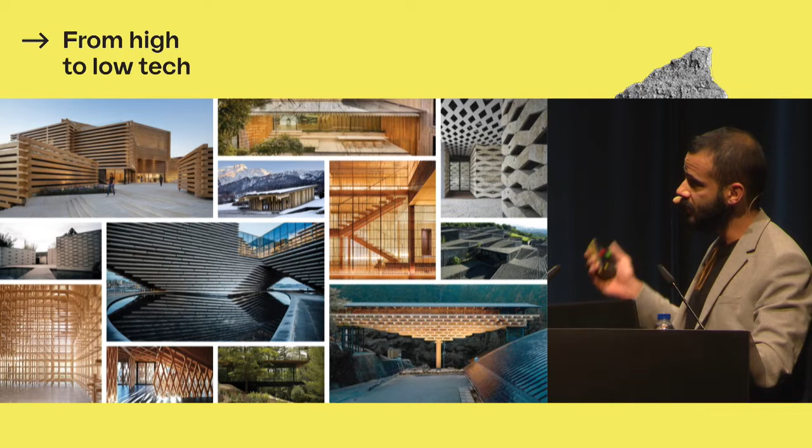So I have to double click. So I'd like to talk about the work that we do, but I will not focus on any specific material or a specific project, even though I'll go through 5, 6 projects. I would more like to share what we call our meta project, which we have been building for the last 5 years maybe, trying to organize and codify the research that happens between the projects themselves, which might look disparate, but there is logic behind the chaos.

For the last 3 decades, Kengo Kuma has been trying to revive the use of natural materials in architecture and to push back against what he calls the homogeneity of industrialized construction. He also half-jokingly often calls this his fight against concrete. And this is a fight that began before concrete had become synonymous with environmentally unsustainable building practices. Because in a way now concrete is the easy punching bag for good reasons.

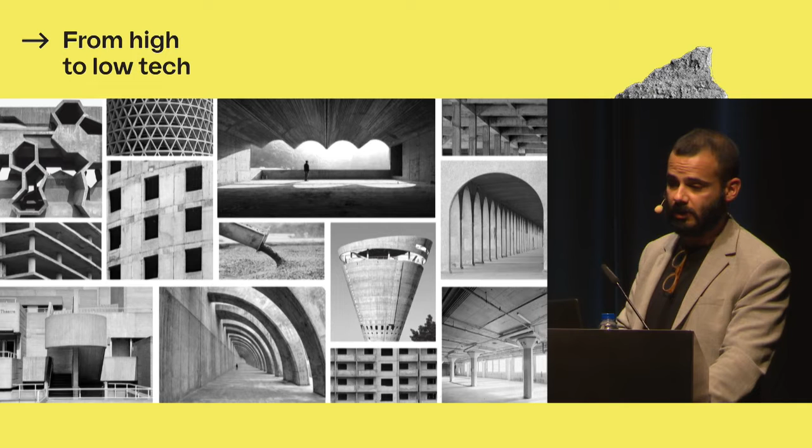Concrete is standardized, it's scalable, it's weather resistant, and it's almost form independent. So it has allowed architects to consider space in abstract terms and to almost disentangle design from material-specific mechanical and functional limitations. So following this separation of space and materiality, local considerations such as weather patterns and norms of habitation and available resources are gradually being displaced. The same material, more or less, works everywhere. In a way, concrete has become a victim of its own success, and we have become its victims in turn.

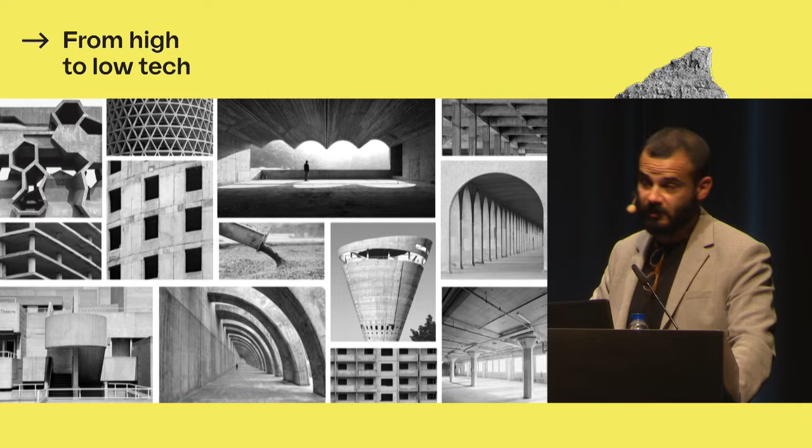So in our office, we have the luxury, perhaps, of having built a narrative that spans 3 decades, where material is the main parameter of design. And I say luxury because this strong narrative often allows us to push our material agenda onto projects. And we often have to be very pushy. And we often fail also to push it. So we want to make a case for material thinking. There are different scales to the story of our material agenda and to how we push it. I would like to start from the small scale and gradually zoom out towards an overview of how we want to rematerialize space.

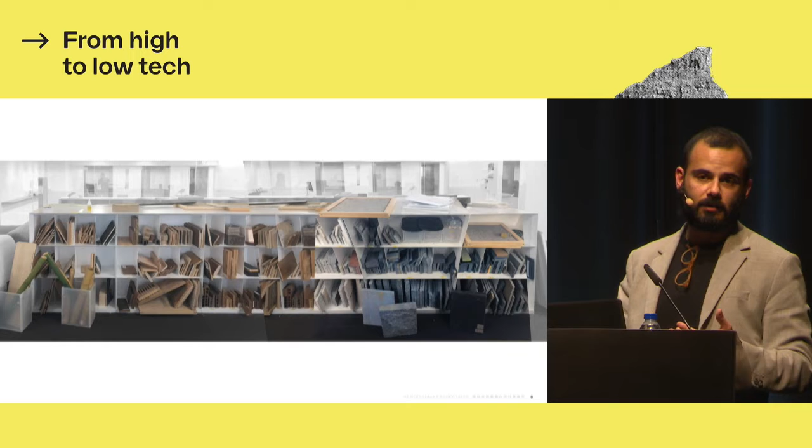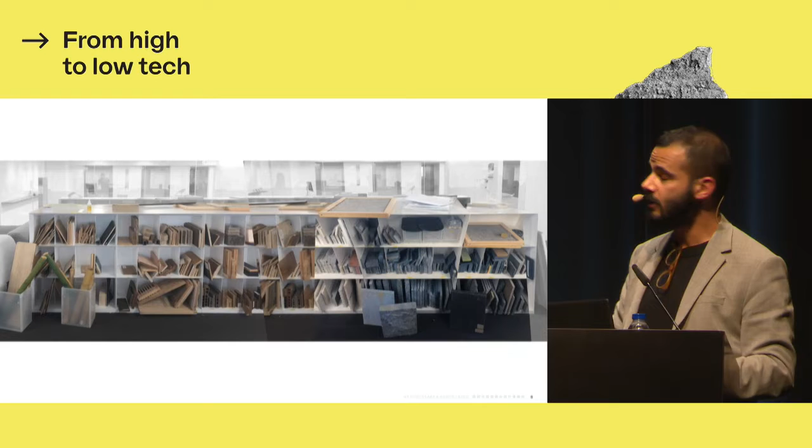In our office in Tokyo, we start concept design with cataloging local materials, vernacular structures, crafts, and techniques. These are then explored, iterated, recombined, either between themselves or with other systems that we have developed in the past and built. And then this library, it's a physical library, it's also a digital library, it's a library of reference, it grows, it keeps evolving, it keeps expanding. We often start by building material vocabularies, meaning modules or elements, and grammars, meaning rules for combining them into bigger assemblies, that often shape the direction of the project until the very end.

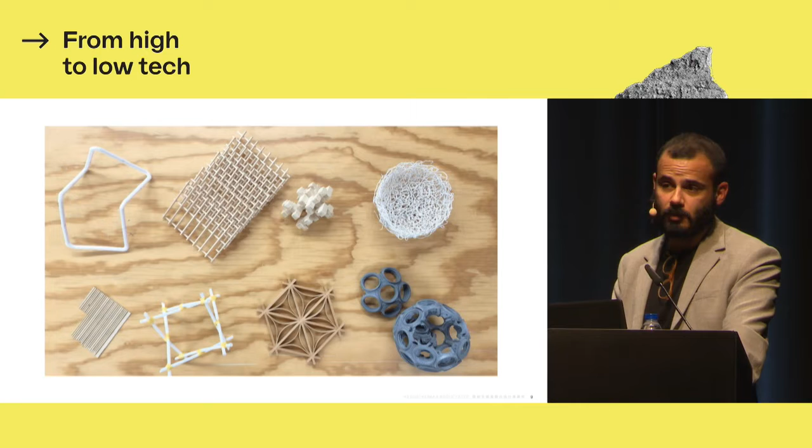This early introduction of the material parameter from concept design has the interesting effect of localizing the design problem before we even start designing. And this is because local materials, as well as their processing and assembly methods, are completely connected to place. In a way, they encode information about available resources, local technologies, weather conditions, and even social habits. And more often than not, natural and composite materials enforce a scale of design and construction that inevitably brings architecture closer to human realities.

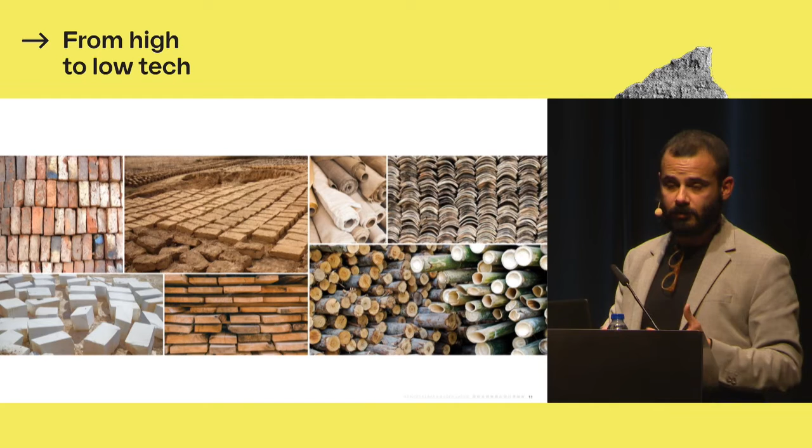Unlike undifferentiated solid megastructures, continuous concrete megastructures, for example, assemblies of smaller elements from discrete materials can reframe for us the narrative of architecture as something that is human-centered and built through a collaborative process of making. We can recapture in our own built environment the scale of things, real things, shaped by human hands. Things like bricks, planks, shingles, or tiles.

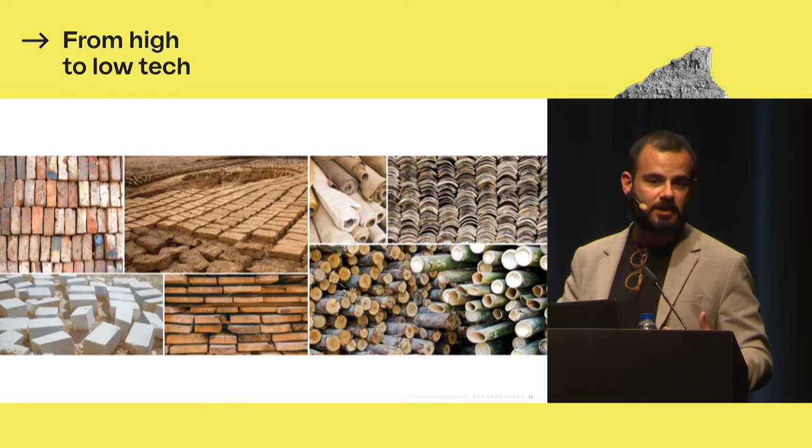They have all been dimensioned by the inherent abilities and limitations of the human physiology, and apparently soon by the interaction of human physiology with machines, but still they refer back to the human body in one way or another. And of course, the affordances of the body of the builders. I am aware that this is a somewhat romantic representation and that what we usually build in cities doesn't look like this, but in a large part of the world, it still looks very similar to this.

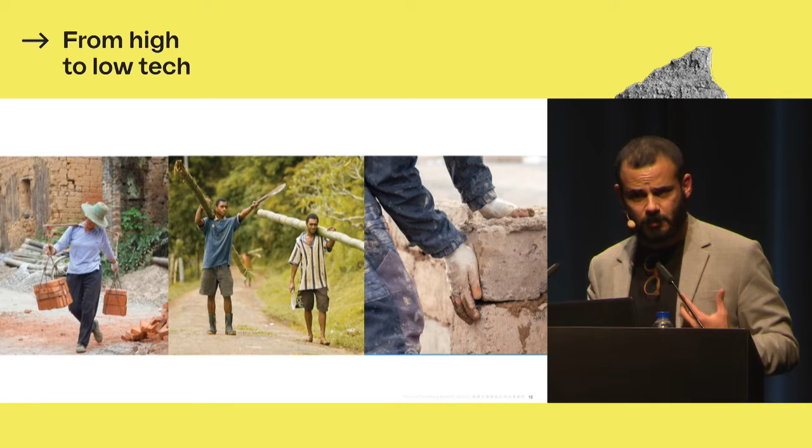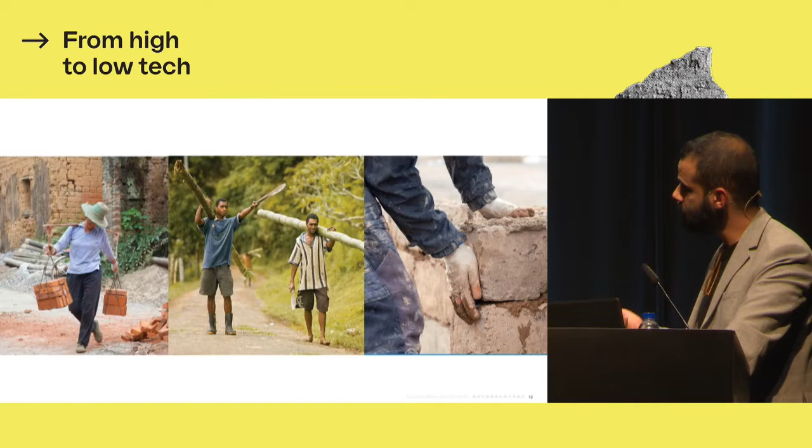And this material-centered thought process actually reflects back on the body of the architects too, who unfortunately often find ourselves locked on a desk, behind a screen, behind software that we hate looking at. Because most of the time, there is no standardization of dimensions or structural modeling of new, natural, or hybrid materials. And this means that design cannot take place on paper. It's just impossible. It has no meaning. But it has to be developed through models, through tests, and through mock-ups. From the beginning, not towards the end of the design process.

So we often find ourselves on the same table with craftspeople, manufacturers, and structural engineers who need to be involved from the very beginning and not just as consultants. So research and design overlap to such a degree that they become entangled, and it is no longer possible to draw a causal arrow from one to the other. So the result is not so much design through research, but rather design as research. And we wanted to show that.

We have been working organically for many years, and we wanted to somehow step back from what we have been doing ourselves and try to contextualize it, try to tame it, and try to see where it could go. So we first tried to show this process of design as research, our meta project, in the 2016 Venice Biennale, Reporting from the Front. The topic of that Biennale kind of put a mirror in front of architects and asked us to face our responsibilities and say, what are we doing to make ourselves relevant? So it was a good excuse for us to start thinking about it.

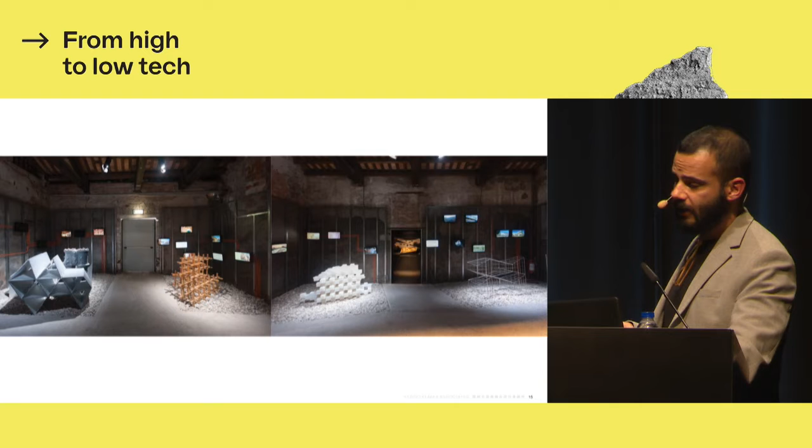We made a selection of about 30 small experimental pavilions in order to show the links between projects. So we showed structural systems that were developed and adapted through trial and error and evolved from one project to the next. We followed these systems as they changed in scale and material incarnations, and we organized them into families. We call them tectonic families. And the way we organized it was in families that were called, for example, here at the top, stacking of planar elements, and at the bottom, weaving of linear elements. So in a way, we thought in terms of geometry and process of combining elements into a larger structure. So this was the first attempt at seeing our projects as embedded in a framework of research.

I need to say, there is also a real evolutionary relationship between many of those projects. It's not that we just put them together, see what looks like what, and then we showed them together. Literally, we would take a mock-up from an unfinished project that was still ongoing, then bring it to another design team, and they need to do something else, but they need to do it in another material. They would try to use it, and it would become something else.

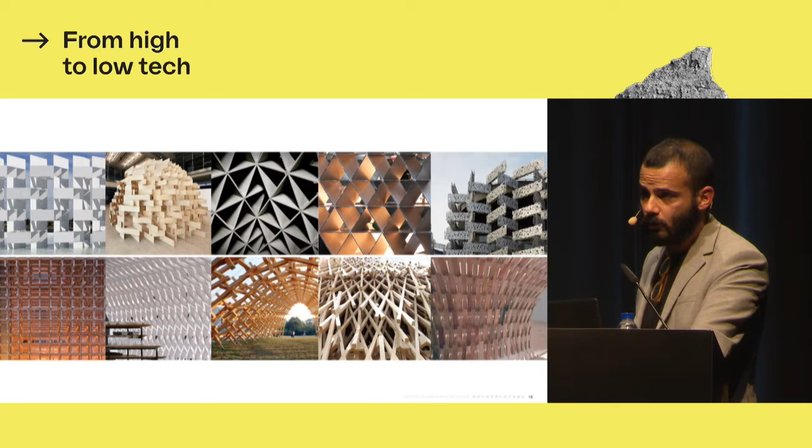So for 2 years following the Biennale exhibit and until 2018, we tried to clarify and expand these genealogies and to document and communicate how the projects were connected between themselves. Some projects were direct evolutions of other ones, while others were born from our attempt to modify a system in terms of scale, material, or structural role.

The result was a large retrospective exhibition in Tokyo Station called A Lab for Materials, where the showpieces were not buildings. We were not showing buildings at all, but families of materials, assembly patterns, and construction techniques illustrated through large life-size mock-ups. Often the same mock-ups that we had used in construction sites. If they were still in Tokyo, we used them in this exhibition. Unlike the more limited Biennale exhibit, this research tried to cover almost all of Kengo Kuma & Associates' built work.

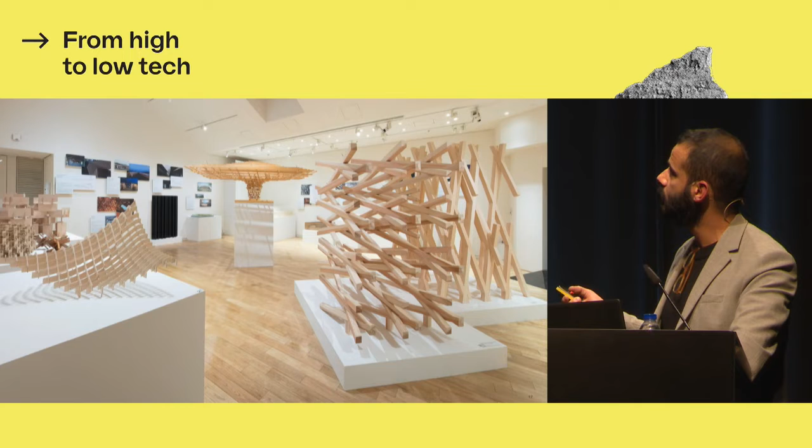To place it in one overarching diagram, a taxonomic tree, we could call them genetic relationships in a very broad way. They do not exist among different versions of the same system family only, but also laterally across systems. What we wanted to show with this exhibition and tree diagram is that the implementation of new material methods does not happen individually within the confines of each project, but there is an underlying network of previously tried ideas. And there is an iteration on this network that produces new nodes and experiments that can grow this tree.

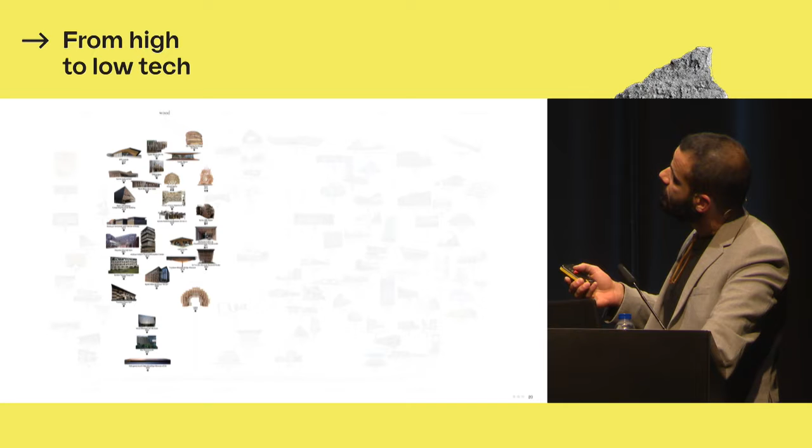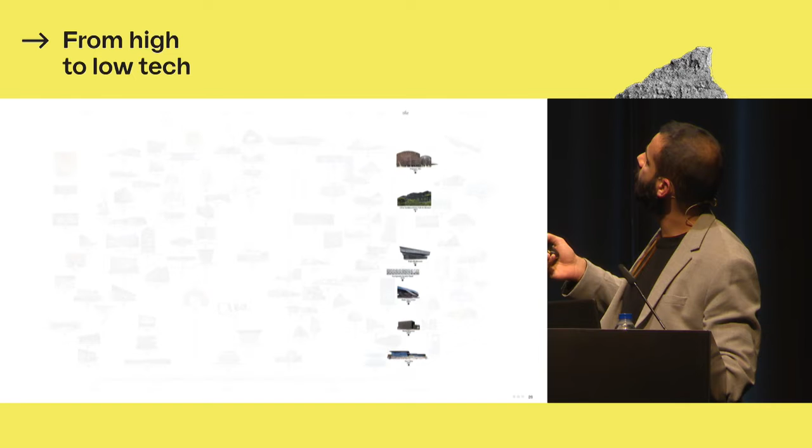In this tree, we included as much of our built work as possible, about 107 projects. We organized them by material and operation, and tried to highlight internal narratives of evolution, both vertically and horizontally. So you can see it iterates through materials: bamboo, wood, paper, earth, stone, metal, glass, tile, resin, and membrane or fiber.

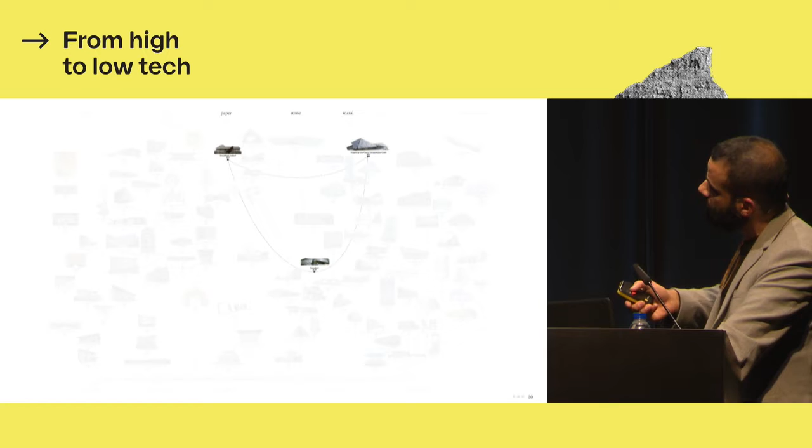But also across the different vertical families or tree branches, lateral lines connect projects that represent jumps, meaning a change of material under the same module or assembly logic. For example, the thin panel triangular lattice systems, which we developed about 2 years apart. One is called Polygonium, in extruded aluminum with aluminum sliding joints. And the Stone Card Castle that came a bit later was done in Pietra Serena with local craftsmen from central Italy, in a completely different context, with different joints and implications.

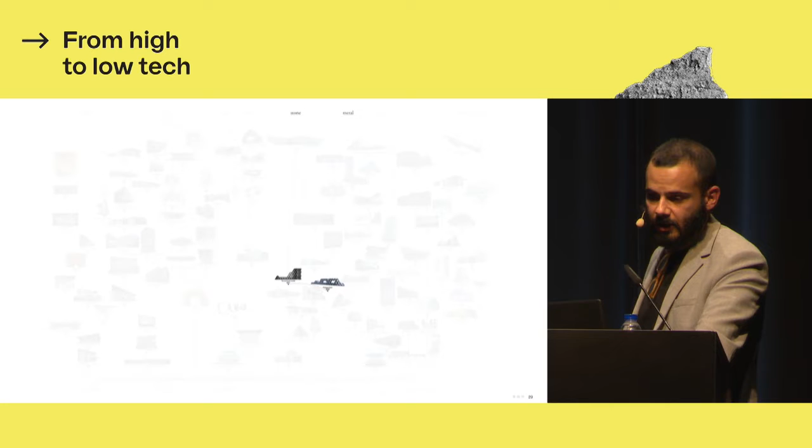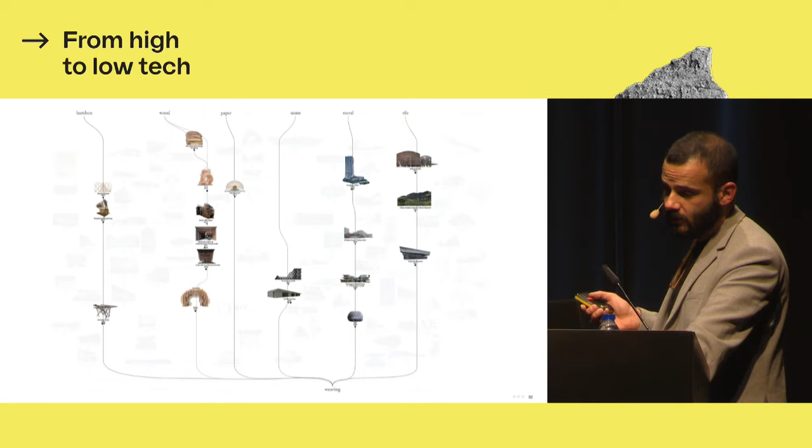And then, running across the different material families and linking them are the methods for combining elements. We call them particlizing, weaving, reciprocating, wrapping, and stacking.

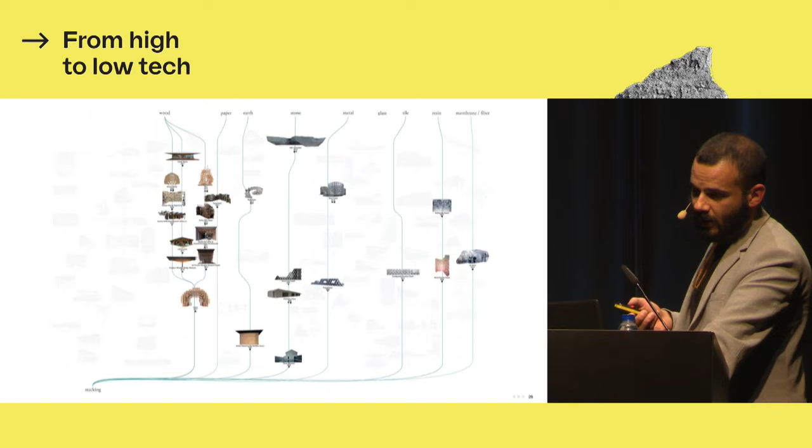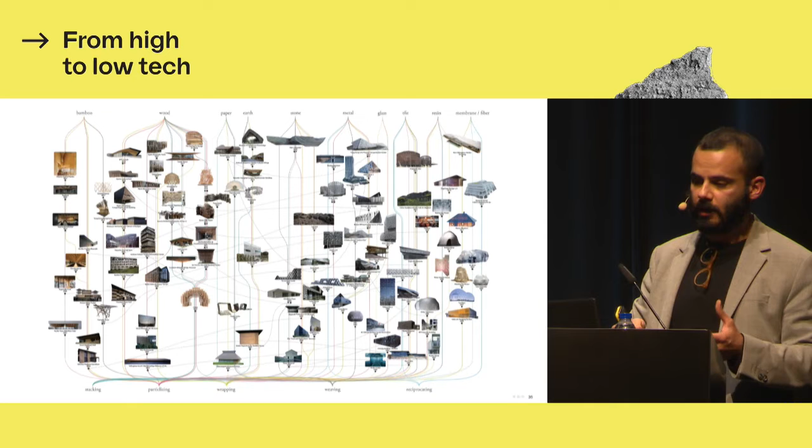I have to emphasize that the categorization into these taxonomies is not strict. This is not a scientific classification. It emerged intuitively as we talked about our own projects, out of a process of employing materials in human-sized units, like sticks, panels, tiles, loops, which are then combined through assembly operations into larger aggregations. And then they work as furniture, partitions, facade envelopes, or building structures. So we prefer to use this diagram as a map that traces the lineages of material research and the affinities between the projects, both past and future.

But most importantly, we use it to make the point that design, especially a material-centered, non-standardized design process, is inconclusive and continuous. Every new node in the tree diagram just poses new questions. None of these is finished, and none of these is perfected or finalized.

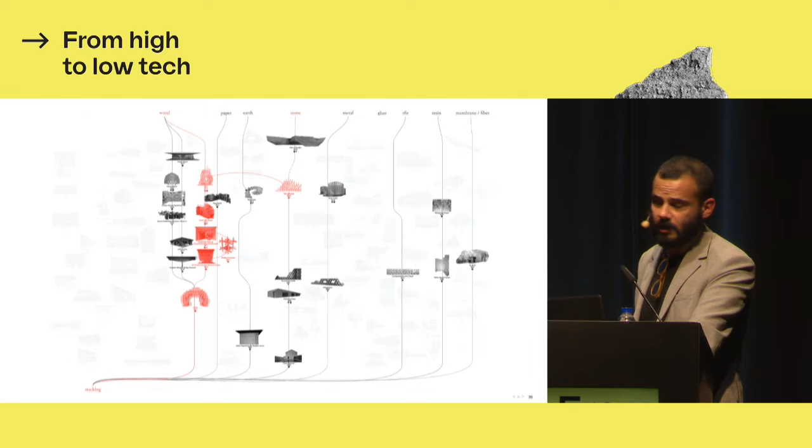So the entire tree goes through 107 projects. And I would like to take you through one of the sub-families, which is perhaps one of the most recognizable ones, the one we call wood stacking. It could also be called wood weaving because it combines the stacking and weaving processes, mostly.

We can follow the wood stacking lineage and observe, sequentially, how a construction system inspired by a traditional toy develops. It scales up, it warps, it becomes a screen, a structure, a framework, and finally switches material to become something completely different, in the span of 8 years and 7 projects.

The wood stacking family started with a fascination about a traditional joinery system. The system is called chidori, and it was originally used as a novelty. It wasn't a structural system, it was used for screens, and nowadays for the creation of a wooden puzzle toy, in Hida Takayama, an area in central Japan famous for very sophisticated carpentry.

In Mumaya Valley, in Hida Takayama, one of the earliest examples of this joinery system is still preserved in a small repository. The story goes that in the early 1600s, a master craftsman created a screen door that no one could understand how it was put together, until a rival carpenter who couldn't stand this anymore snuck behind the screen and cut it open. And he understood the joinery. We know the name of that carpenter, Jinbei Okada, because he popularized the system and started building it everywhere, mimicking the original method and making it very popular in Takayama.

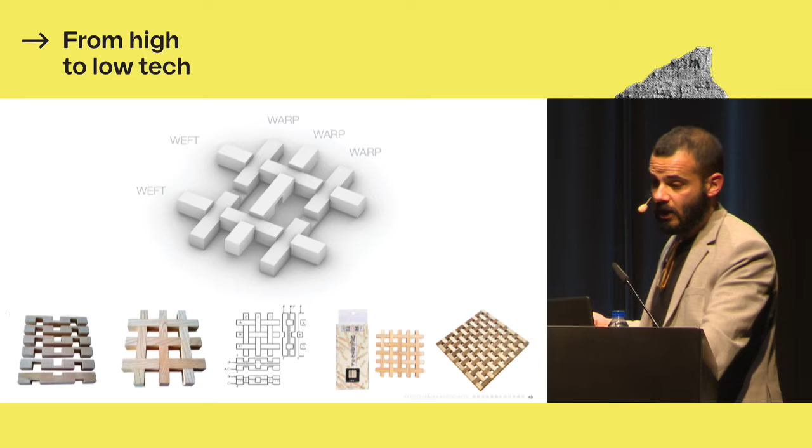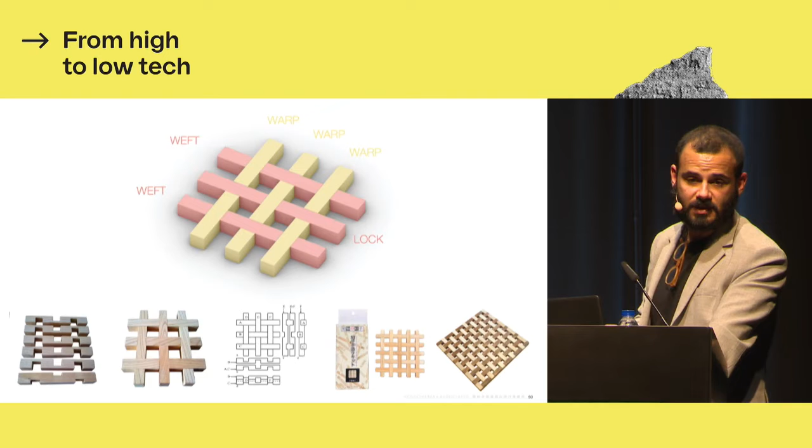Then we have exactly enough space in the center for one last stick called the lock. In the toy pieces picture, the last piece is slightly different - the notches are 1/3 through the stick, not 2/3. This means once we slide it in and push the whole assembly down, it locks, and it interlaces into the Chidori weave. Of course, the opposite process is needed to disentangle it, but if you don't know exactly what stick is what, you can spend a lot of time pushing them around until something moves.

This system was used for 2-dimensional screens originally, but variations exist in Takayama where a similar 3-dimensional joint is created. It's the one that looks like a 3D cross. There are many different flavors of this.

This XYZ joint intrigued us more than the screen, because it showed us the possibility of creating a wooden structure that can be locked and unlocked into place without any tools, without any nails, without any additional components.

There is this common narrative of Japanese joinery - structural joinery assembled without nails, but structural joinery locks in place and cannot be disassembled. But these joints were different - they were intended to be disassembled by a single person, like a toy.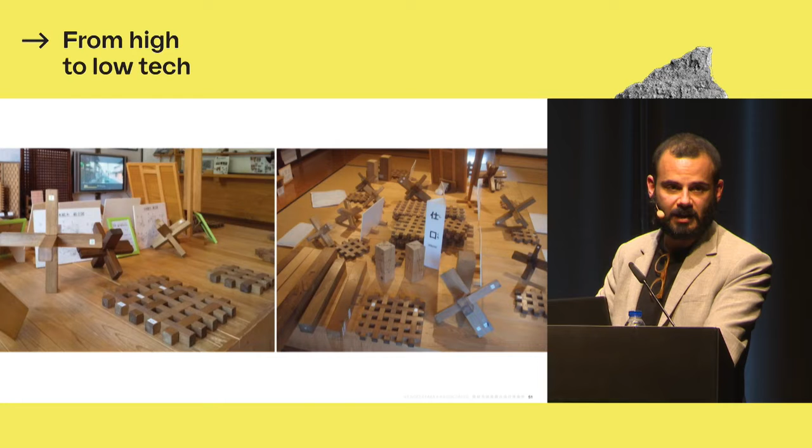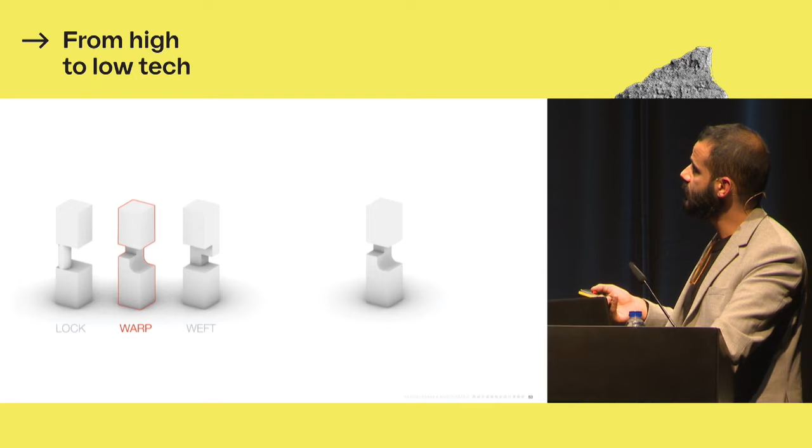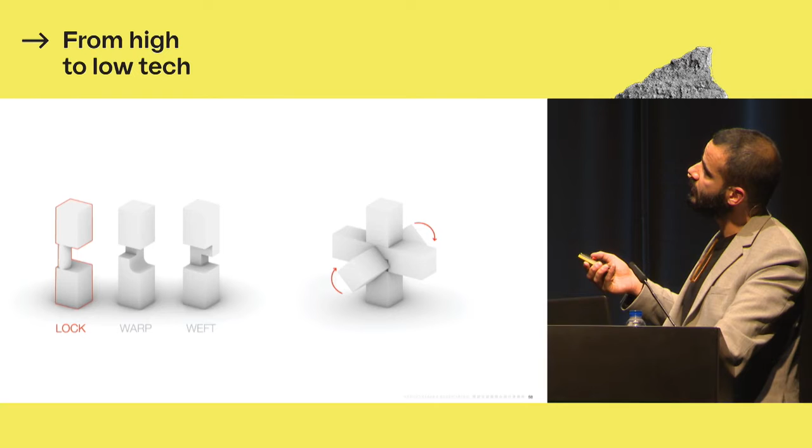The logic of the 3-dimensional joints is similar to that of the 2-dimensional screen. We have 2 directions that weave through each other, and the 3rd direction acts as the lock. So the assembly starts with the warp. Then we put the lock element and rotate it into place just enough so that we can slide the weft all the way in. Then the pivoting lock part can rotate again, and we end up with an XYZ cross joint.

The joint is invisible. It's less stable than the 2-dimensional joint, and this is something we had to deal with eventually. But as architects, we were deeply intrigued by this idea of an invisible joint that locks into place just through some 3-dimensional manipulations. So we really wanted to make something with it.

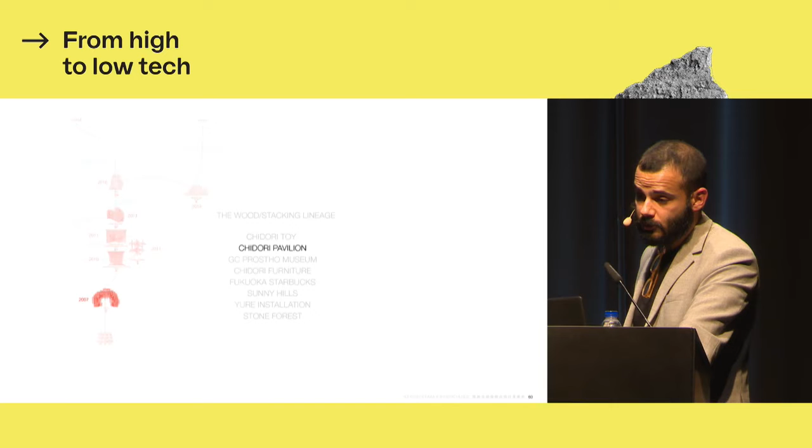We wanted to make a pavilion, and we got our opportunity in 2007 with an invitation to build a pavilion for the Milano Salone. The pavilion was made of continuous sticks with several notches for the intersecting nodes, but it was very challenging to put together.

Unlike the traditional Chidori screens or cross joints, here we have many different sticks, many different lengths that correspond to this organic outline that we wanted to make, both the exterior envelope and the hole inside this wooden cave.

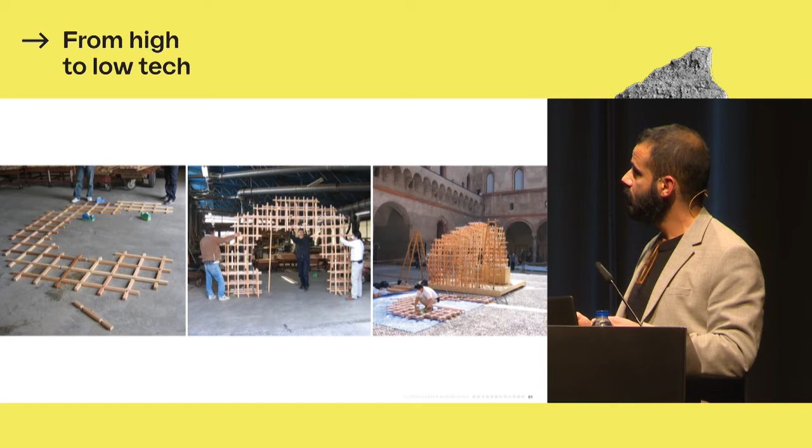So in order to manage the complexity of this assembly, we had to create two-dimensional sections with their respective instructions, slices of the pavilion if you want, and then we had to lift them vertically, support them temporarily, and then bring the third direction and rotate them into place. It was acrobatics with many workers.

It worked, and the final pavilion was very lightweight and transparent, but also very pliable and fragile, due to our decision mostly to maintain fully operational joints without permanent fixations. So after the exhibition, with only a few strategic twists of the members, the pavilion joints unlock and it just breaks apart into the component sticks.

So the Chidori system was clearly applicable on an architectural scale, even if it's a small architectural scale, but it left many open questions as to its structural capacity. Bonus points if you can see the extra support stick because the pavilion was bending - it's a bit hidden in this photo.

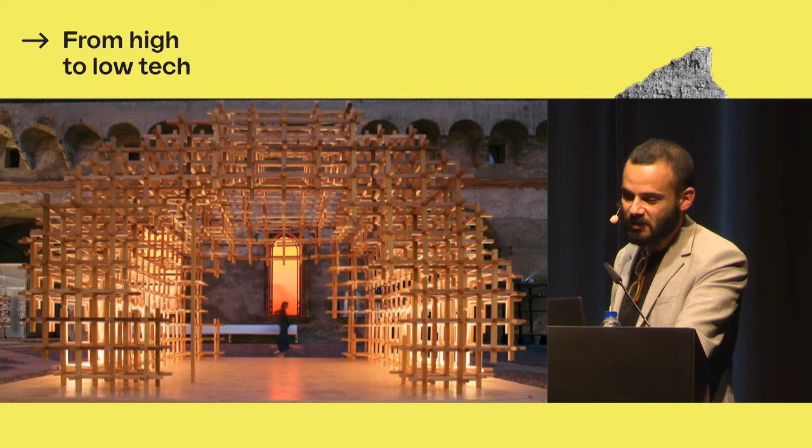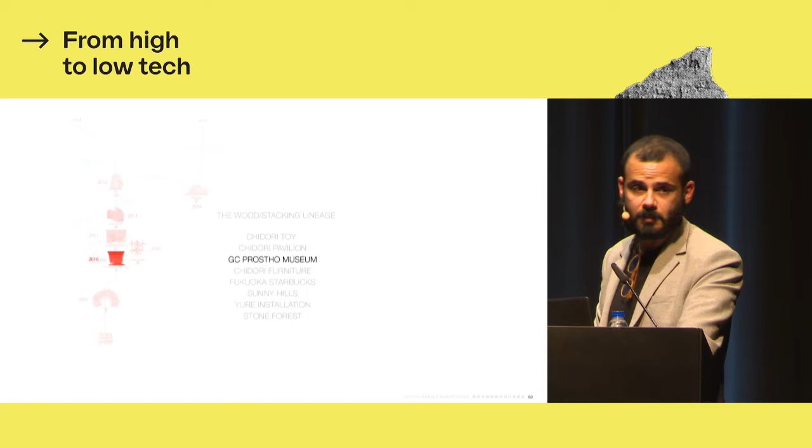For this reason, we wanted to try and apply it to a full-size building and push this joint system to structural sufficiency. This happened in 2008, a bit more than a year after Milano Salone, when we got the opportunity to design a museum and exhibition space for a dental clinic in Western Japan called GC Prostho Museum.

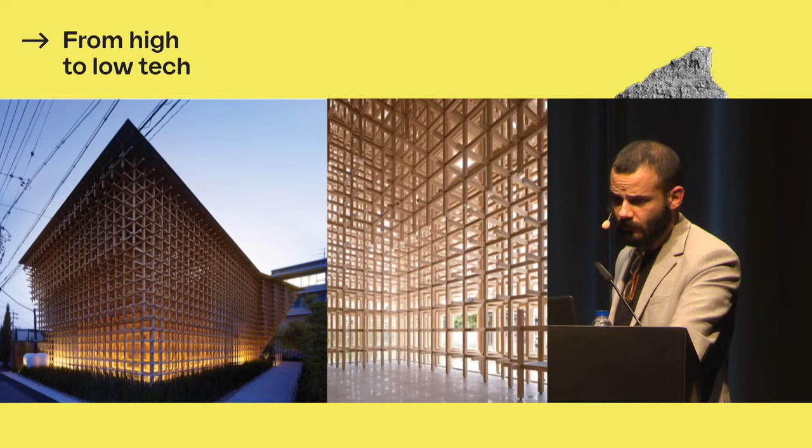We ended up building almost the entirety of the museum using 60 by 60 millimeter sections of wood with a small core buried inside, done in conventional construction. One of the main lessons of the Chidori Pavilion was that there is a price to be paid for the mobility of the joint. The entirety of the section of the wood member, as you remember the joint, is not used structurally because we have removed most of it.

Only a quarter actually transfers loads across the joint. So because of this reduced structural section, we increased the size to 60 by 60 millimeters, while in Milano it was half the size. And we decided to immobilize the joints after assembly, permanently locking them into place. So the entire structure was organized in sub-blocks that were sufficiently rigid, and they were connected to each other through a slotted joint system that is slightly visible at the ends, at the fringes of the block.

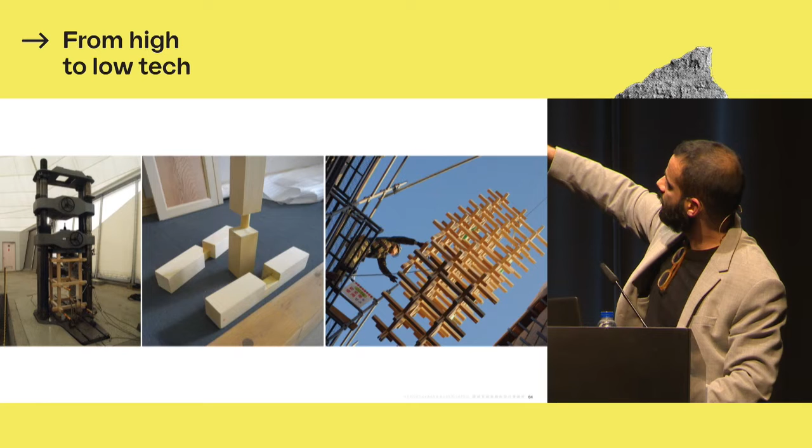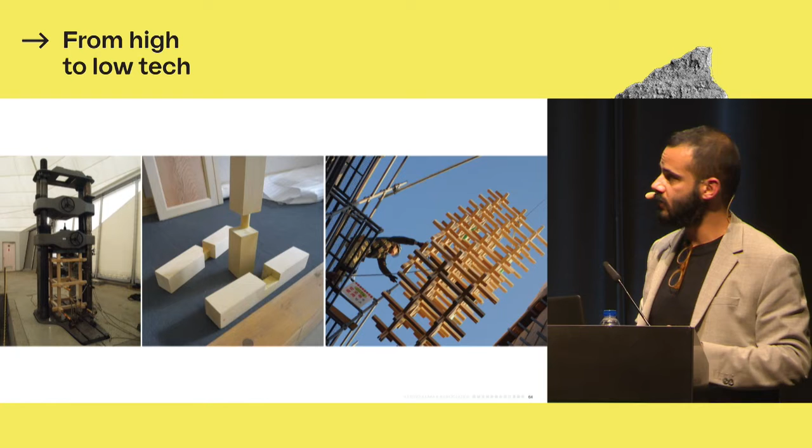So we did use the modularity and the mobility of the joint to make the bigger modules, but then we locked them into place. Of course, extensive structural testing had to be done since the loads, this was a real building, and the loads would be distributed to hundreds of individual small members, which is very different to the standard strategy of having a few concentrated columns, and it's rather atypical. So we had to research this almost from zero.

GC Prostho was one of the first projects where we started realizing the synergies that can be gained from this kind of porous material envelopes, where architectural elements no longer perform single roles. And the sticks are not only supporting the building, but they also function as window frames, furniture, and display cases. And almost everything is expressed through a single continuous system.

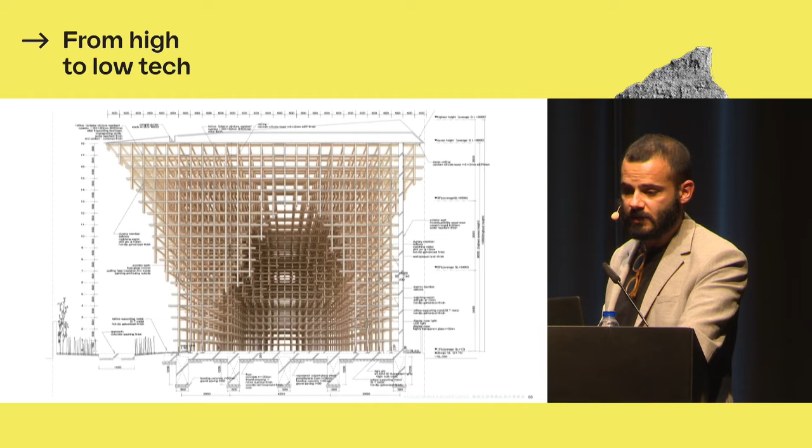So in the end, we had to give up joint mobility for structural integrity. But three years later, in 2011, circumstances allowed us to use Chidori in its original form as a deployable system that can be disassembled.

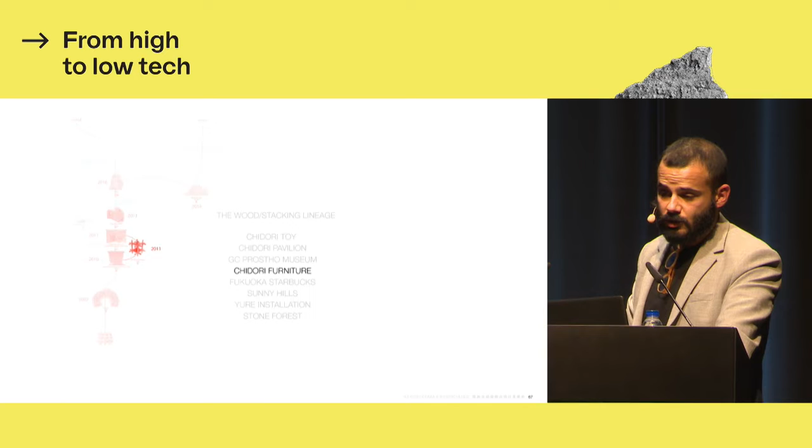In 2011, a devastating earthquake and tsunami hit the coasts of Tohoku, causing large-scale destruction in urban and rural areas alike. And as a bonus, it exploded a nuclear power plant too. A few months after the disaster, Japan was still trying to cope with everything. The East Japan Project was formed.

East Japan Project brought together designers and architects from all over Japan and paired them up with craftspeople from the region of Tohoku. We collaborated with the artisans to develop novel items that made use of local materials and human expertise, offering support and increasing the visibility of the recovering communities as these items were then sold into museums, galleries, and boutiques. The Tohoku region is famous and it has been traditionally associated with small-scale craft manufacturing.

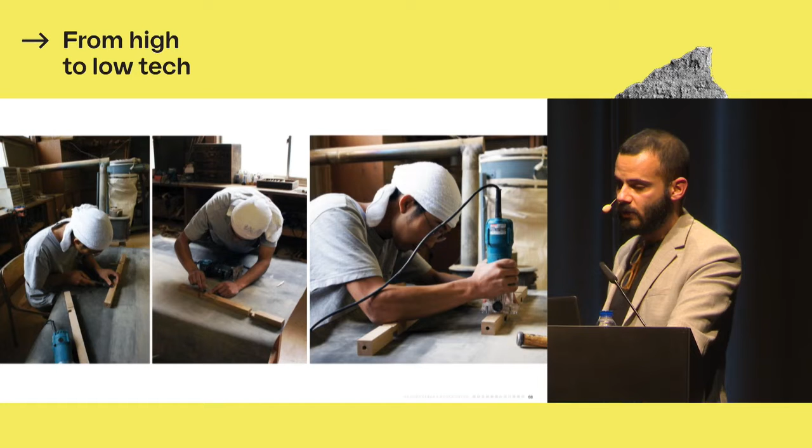So we decided to work with the local carpenters and make a furniture system based on the Chidori joint. So we reintroduced the rotating joint function that allows quick disassembly. But unlike the Milano pavilion, we standardized the stick elements and brought modularity into the system.

So we now had a set of 12 equal length sticks, if not identical, because we had 3 different kinds of stick role - the warp, the weft, and the lock - plus flat wood surfaces. And this would be enough to assemble a self-sufficient Chidori furniture module.

The module is cubical, and its edges extend by half the size of the cube. So we then connect these spiky cubes with simple wooden plugs into larger assemblies and different combinations. It was really a simple cubical grid, but the flat panels that worked as shelving also helped us create rigid planes and help the whole thing stand much better than the original Milano Salone pavilion, which was quite shaky.

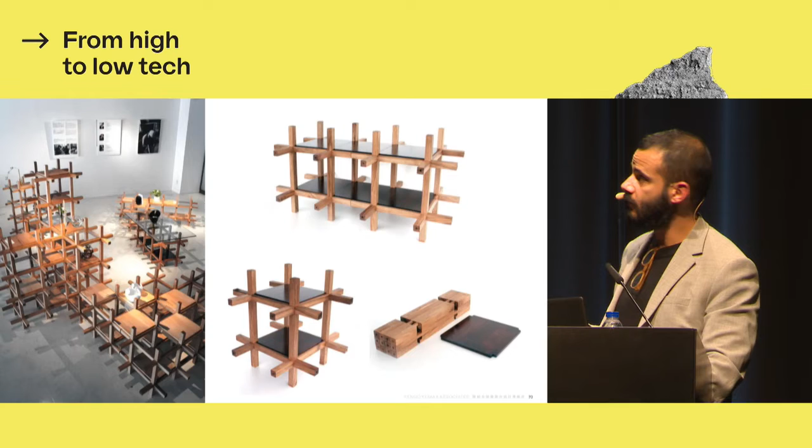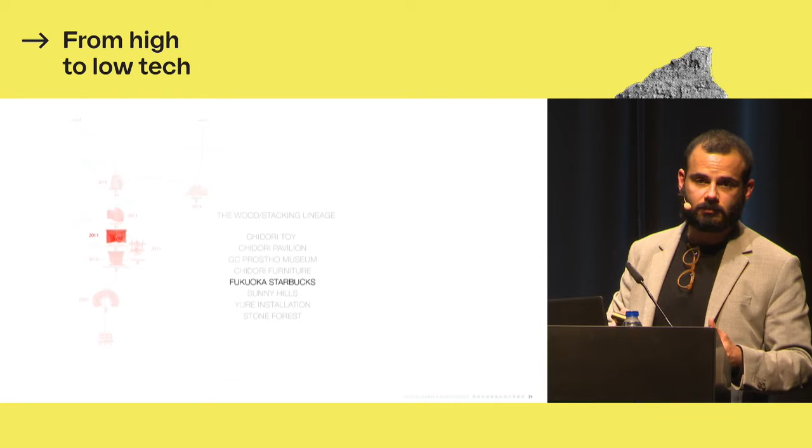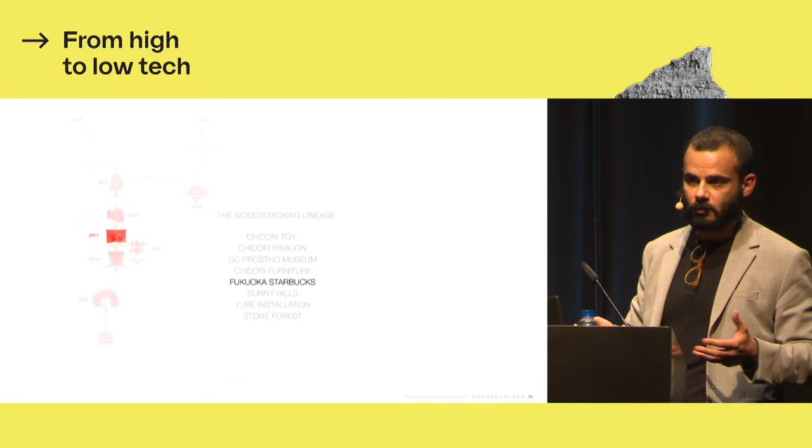In parallel with the development of this furniture system, we started exploring more radical variations. The space that we had created in GC Prostho Museum, this wooden lattice spreading like a transparent cloud of solid elements, was something that showed us a lot of possibility for future design iterations. So we wanted to explore that more and to investigate the idea of a dispersed, particleized - this is an invented word, but we use it - particleized structure, or a particleization of architecture.

And we got the opportunity to do this in 2011 when we were asked to design the interior of a Starbucks cafe in the historical area of Dazaifu in Fukuoka, in the south of Japan. The main challenge was how to draw people inside a deep and narrow space with a very small face to the street. So we wanted to use a grid cloud, like the GC Prostho Chidori system, in order to create an environment, a ceiling, and the shelving elements.

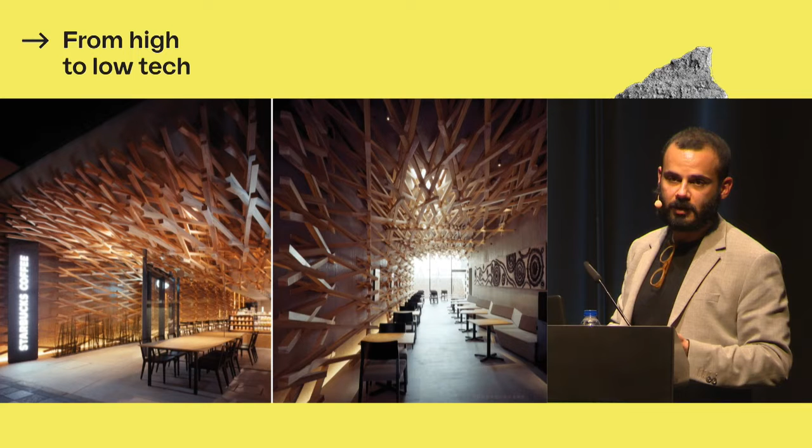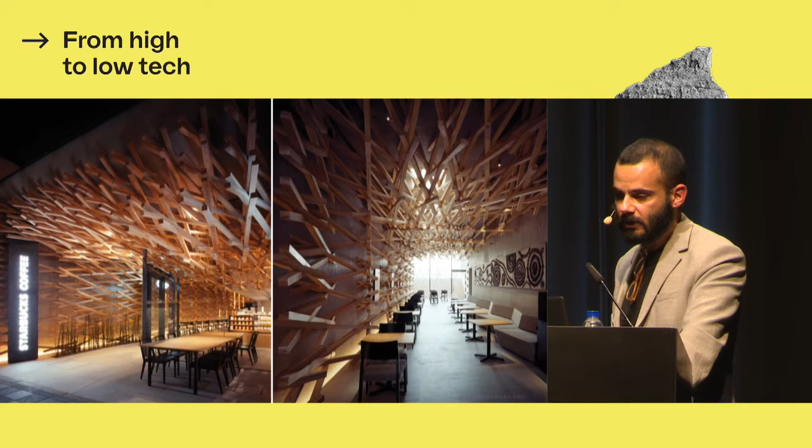But there is, of course, a problem with cubic grids. They are not directional, they are static. So we tried to deform the cubic Chidori into an oblique three-dimensional lattice, diamond-shaped, and to give it a sense of fluidity, but also to give a very different perception of its density and shape according to how it was approached by the people.

It wasn't as simple as just deforming a cubic lattice, we soon discovered. So we had to start rethinking it. Orthogonal grids have the wooden members crossing at every intersection, like 3 wooden members. But this oblique grid ended up having 4, which necessitated wood joinery of greater complexity. And actually, we ended up using steel dowels, sandwiching the 4 members together.

We had to simplify a bit. So we broke the grid apart into smaller elements, maybe closer to what we did with the Chidori furniture system. And these elements look like X-shaped butterflies. You can actually see them. These butterflies are joined to each other, and each of them is joined to 4 other butterflies with these steel joints. The sticks are 60 millimeter square in section, exactly the same as the GC Prostho Museum.

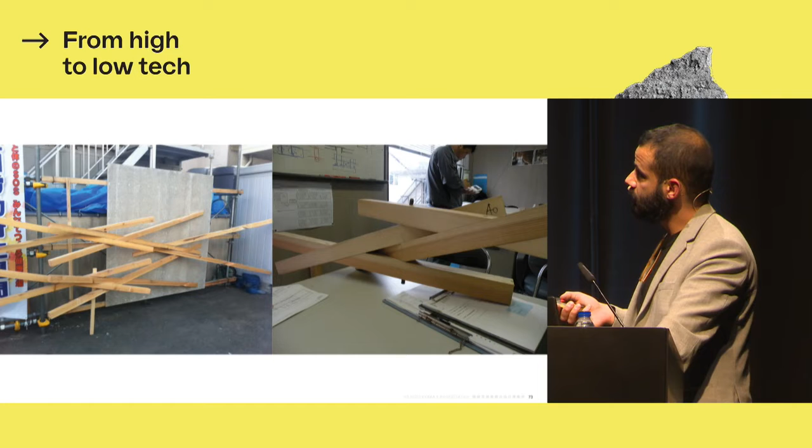But the joints are fixed from the beginning. There was never any mobility there. They cannot be disassembled by hand. This oblique grid had a very beautiful lightweight appearance, but it also had a very obvious drawback that we wanted to deal with in another iteration of the system.

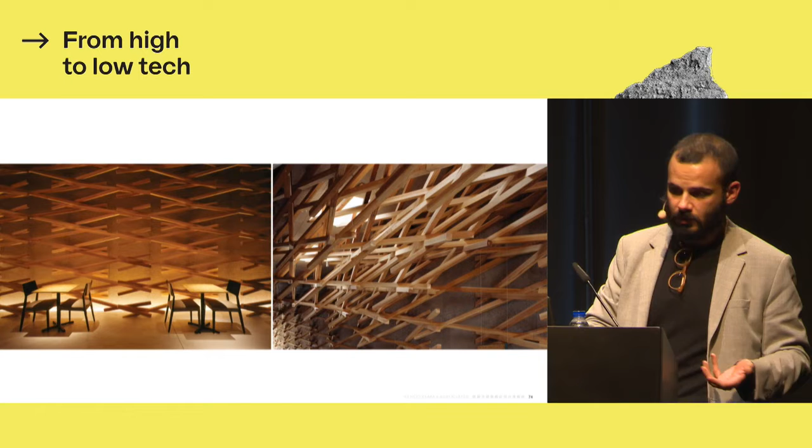Because of the way the modules are joined together, and this is something you can see more in the left picture in elevation, there are no continuous linear elements throughout the whole structure. The elements are interrupted. This means that if you want to load this structure, you cannot effectively transfer loads. It will collapse. The joints will break. And we wanted to use it as structure, and we wanted to use this directionality that it has in order to create a structural direction to the system.

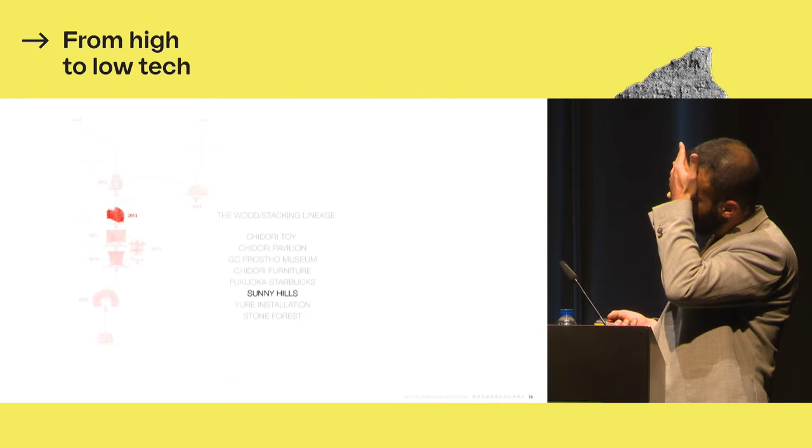So we rotated it 90 degrees. And then, of course, we had to redesign it. In 2013, we were invited to do a pineapple cake shop in Tokyo. And it was one of those dream clients that lets you do anything you like. By rotating the oblique lattice of Starbucks Coffee by 90 degrees and creating a vertical framework, we transformed this lattice into a structural system to take loads for a small 3-story building.

But of course, rotating was not enough, because as you saw, there was no continuity, and we had to redesign it. In order to redesign it, we went back to the source, the original 2-dimensional Chidori frame. We created these lattice surfaces that lock into place exactly like the original screen system, with weft, warp, and lock members. But unlike the original, these are deformed into a diamond lattice, which comes into play later.

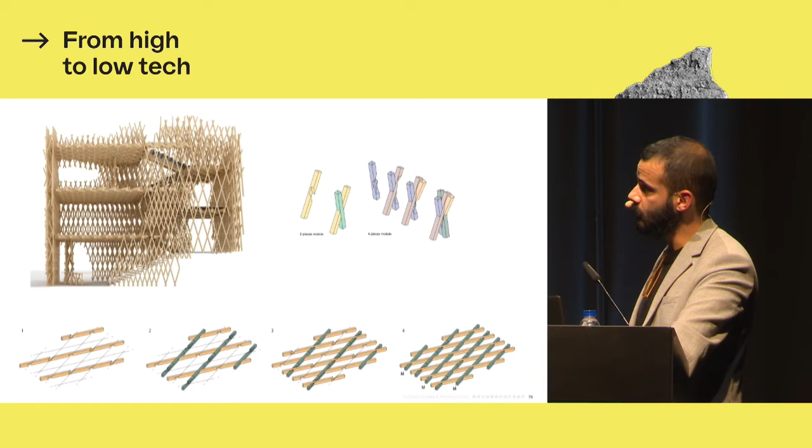Also, as opposed to the previous iterations, if you see the diagram of the building, we also tried to vary the scale of the lattices using a variety of densities throughout the building, depending on the architectural role that they would play as dividers, facade elements, or even interior furniture. It was a continuous system, but with variations. And like in the Starbucks cafe in Fukuoka, this wood joint system would have 4 sticks coming together at each joint, but with a slightly different arrangement.

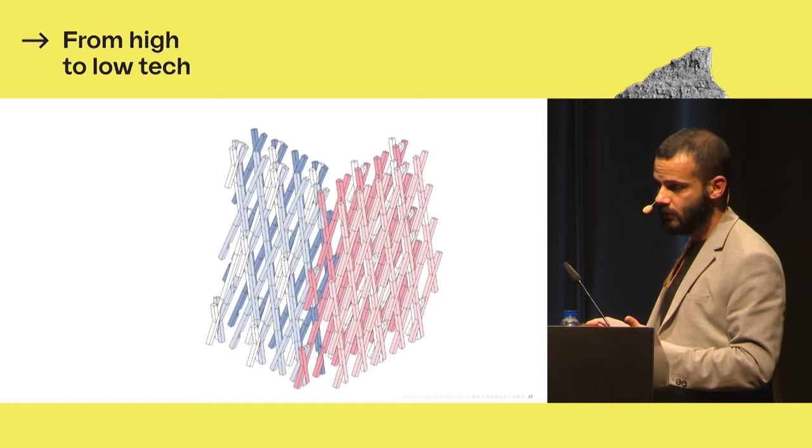So the structural walls are comprised effectively of 2 of the screens that you saw, the diamond-shaped screens, in parallel, sometimes even 3. And then we introduce 2 more directions that are interlaced and lock the whole thing and make it possible to transfer lateral forces as well. So it works as one body.

And we started calling it an exoskeleton, actually, because for us, it stood in opposition to the more usual way of supporting buildings with a vertebrate skeleton with internal, rigid, concentrated bones. Instead of that, we have a dispersed structure that works around the building, that is not separate from the facade, dividers, or furniture.

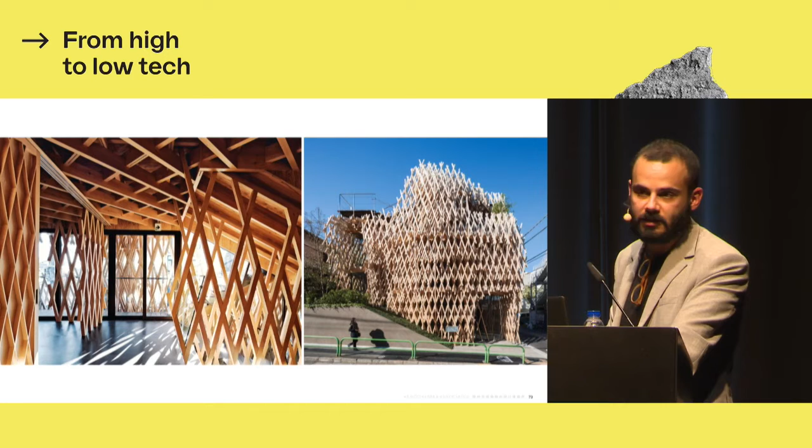But supporting a 3-story building, of course, required stronger joints than the one we used in Starbucks. Just piercing everything with a steel dowel would not do it. So we had to go back into Japanese joinery, and hopefully there was a kind called Jigoku Gumi, which translates into hell joinery. I'm not sure if it's hell for the carpenters or for the users. And it was used for connecting diagonal elements, for reinforcing structures and fittings.

So this knowledge still existed, and we used it to connect 4 different structural members that crossed a node and continued in different oblique directions. This building, the Pineapple Shop, Sunny Hills, was in a way a pinnacle of structural complexity for us and our office. And we felt that it pushed this 3-dimensional lattice to its limits.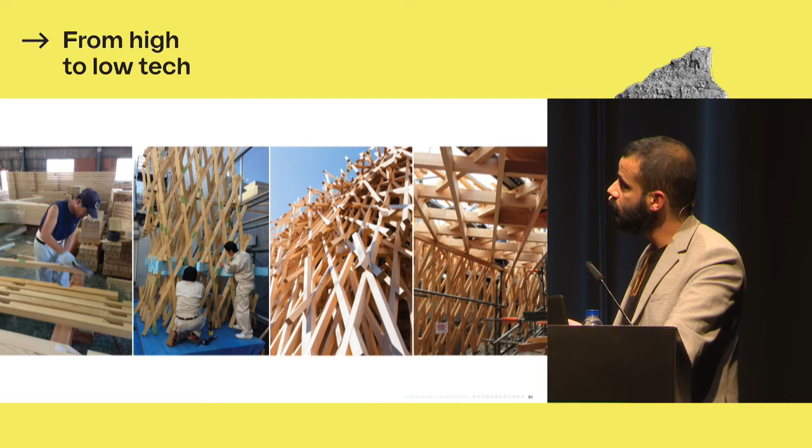So what we sometimes do when something is interesting but becomes too complex is we step back and try to see if we can do something similar but simplified. And this is what happened after the Pineapple Shop. We asked ourselves if there is a way to have directionality without having to revert to hell joints. This question led to the development of Yure Pavilion in Paris in 2015.

We created this temporary pavilion using linear members, just wooden sticks, arranged in an oblique three-dimensional lattice, like Starbucks and like Sunny Hills. But there are some significant differences. First, we use sticks that are rectangular in section, 90 by 180 millimeters, not square.

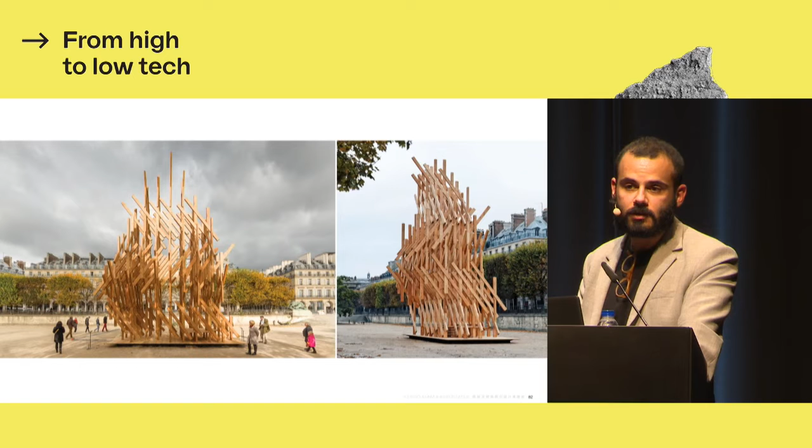Rectangular section sticks have directionality. They have density directionality. And we wanted to see if we could imbue an oblique lattice like this one with different densities. So the rectangular members, as I hope it's clear from these pictures, allowed us to modulate the transparency of the structure depending on where it was viewed from. But still, this was much, much simpler than the previous two systems.

We abandoned the complex three-dimensional Boolean intersections of the pineapple shop, and we tried to work with rotation. So periodic rotation of the members creates a spiral module. And this spiral, as it ascends, is connected to 4 other modules in different points. But still, the joints could be greatly simplified because first, of course, the structure only needed to self-support. It's not a building, it's a pavilion.

And then we managed to only have 2 sticks meeting at any given junction, which meant that we have just a planar 2-dimensional joint solution with a half notch and nothing special, really. This obliquely braced structure was pretty strong, and it was undulating, almost like a flame, really changing appearance as one moved through it and around it.

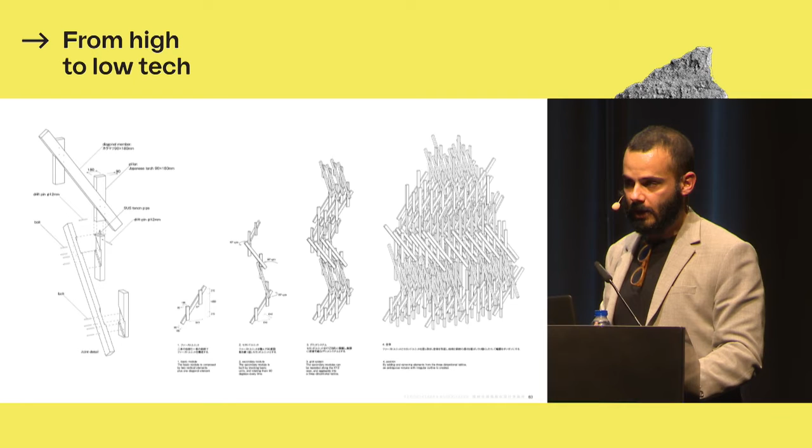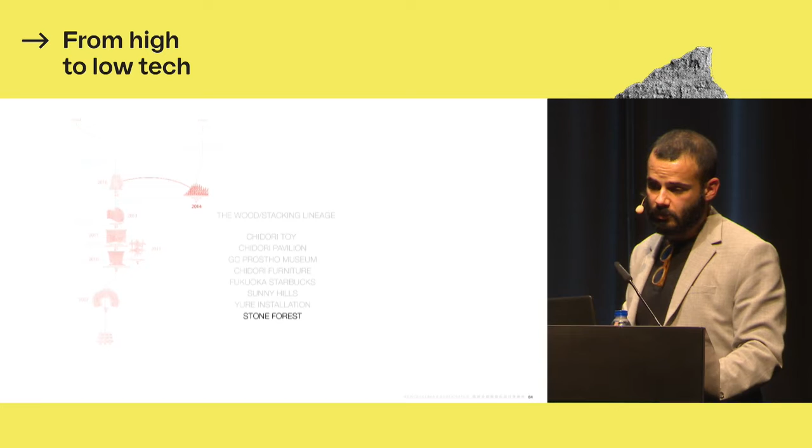At the same time that we were working on Yure Pavilion, we received an invitation to create an outdoor installation in Milano Salone, again, by a manufacturer who wanted to push the limit of their product. It just so happened that the manufacturer was a stone manufacturer, and their main product was marble. And these things often work circumstantially. There's no plotted strategy behind, but we try to see if we can do the same thing with marble, and to see if we can have it behave as if it were wood. The result was Stone Forest.

With Stone Forest, this lineage, the Chidori lineage, went full circle, and it arrived back to Milano 7 years after the original wooden pavilion, inspired by a wooden toy from Hida Takayama. In the previous years, we had developed several projects out of wood using traditional Japanese techniques and also contemporary fabrication technologies. This is something that I have not shown, but we do work a lot with craftsmen, and the level of quality and expertise of manufacturers and contractors in Japan is extremely high, but we're doing architecture, not craft.

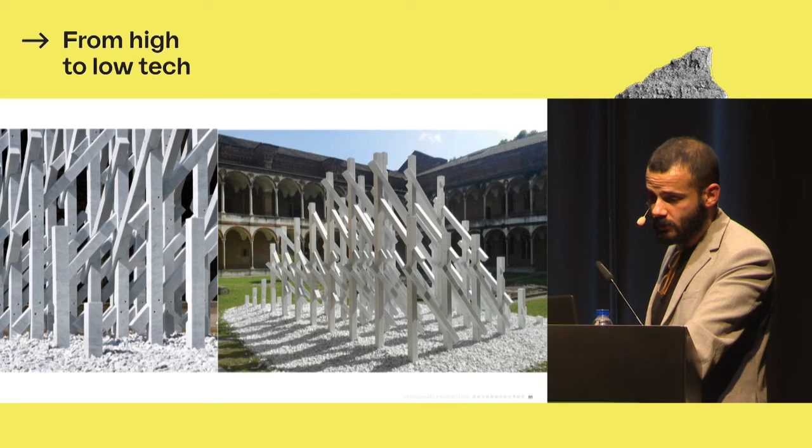So we work with CNC, we work with robots, we work with anything we need to. It's always part of the process. We use all the tools. So of course here we had to use CNC milling of marble in order to put this together. Here we wanted to explore the same techniques, the wood notching techniques applied to the marble, and to see if we could create something very light out of a mineral material, Carrara marble in this case.

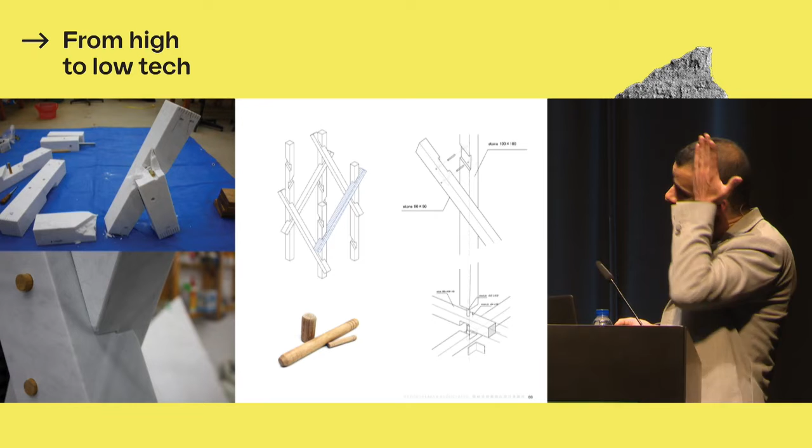But of course, marble behaves very differently. It is a very interesting material, actually. It's structurally quite decent for a stone. In Greece, in the Parthenon, there are marble beams 4 meters in span. So it has tensile strength. But being stone, it's also very, very brittle. We wanted to see how small we could get with these elements, and we managed to go down to 9 by 9 centimeter sections, which were first joined like the Yure Pavilion with half-notch joints.

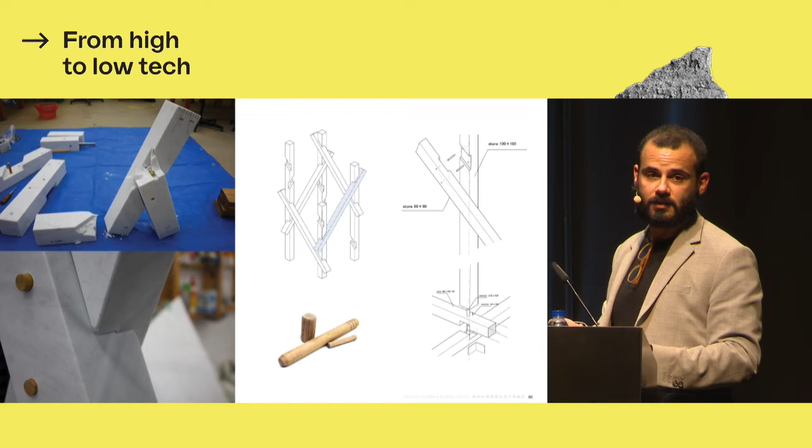The thing is, what works as an advantage in wooden structures, which is a very tight fit between the wooden members, was a drawback here, because a slight torsion would channel forces into the marble, which is brittle, and it would break. So we needed some sort of relaxation. And in the end, our engineers proposed that we use wood. And we loved the idea that we had abandoned wood to make a marble lattice system, but then we had to reintroduce wood as a joint so that it could absorb the forces that marble could not, and the small fluctuations. And it was almost the opposite of the Starbucks lattice, where we used steel because wood was insufficient.

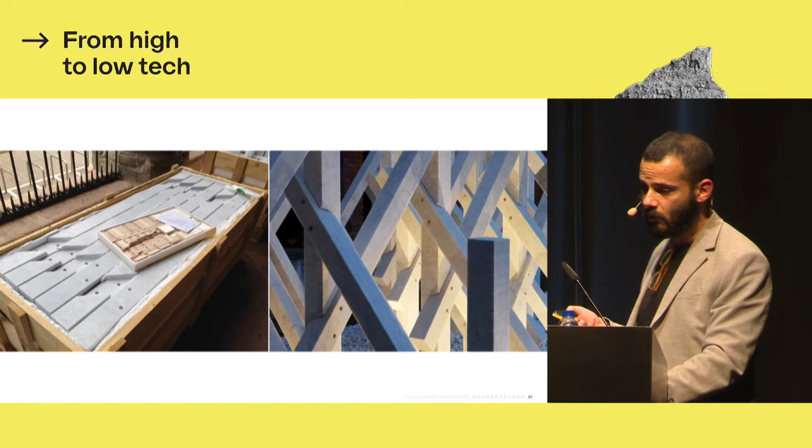Only 2 elements met at any joint at any given time. But of course, the interlacing of all the elements created a structure that was quite strong. We also had to send a small wooden mock-up together with assembly instructions to make sure that the correct order of operations was maintained. Because this is an interlaced structure, if the builders just started putting it together without minding the order, they would find themselves at the end locked out of it without being able to place the final elements.

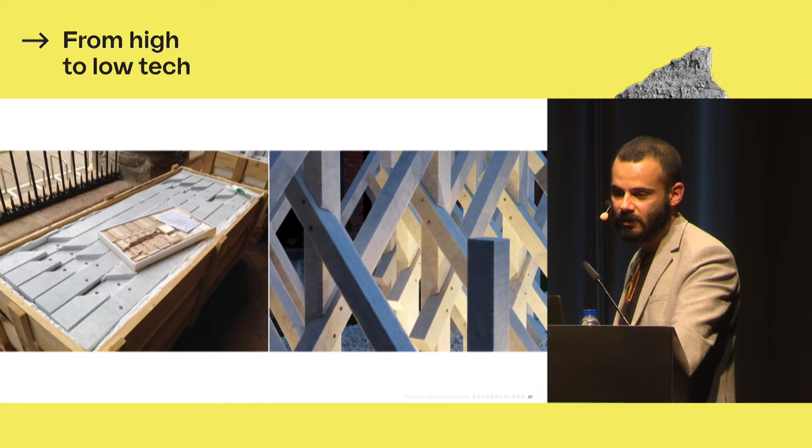So this genealogy started with a wooden toy, and in a way it culminated with another wooden toy 7 years later. And the original 2-dimensional chidori, which had already evolved to a 3-dimensional joint when we found it, became a lattice with several nodes. The lattice grew, it became structural, then it was deformed to achieve directionality, but it lost its structural properties, only to find them again soon after by changing direction and changing joint system, and becoming variable in density, to then go through simplification and more density variation and make a final jump to a different material.

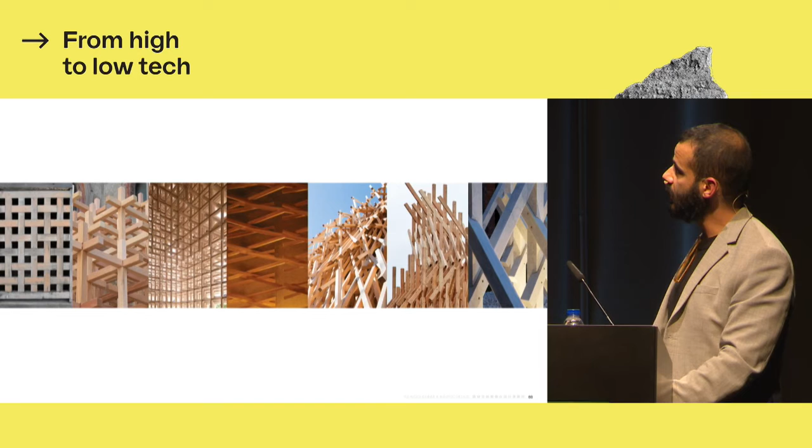Most architects who have tried to introduce new materials in commercial projects, I think, will testify to how much resistance there is. Clients and contractors, they push for rationalization and simplification, and projects are driven by costs and schedules. At the same time, untested materials and constructions tend to fail in unexpected ways, and they fail a lot. They demand iterative designs through trial and error. They also age, they require maintenance, replacement, and recycling. So why do it?

The case for natural materials is often framed in terms of sustainability, like it has been in these 3 days, and it should. Local materials are usually less processed and don't need to travel large distances to the construction site. But for us, what we call material thinking is not only a matter of quantified energy footprint or carbon gains. It's about a deep shift that obliges us to ground the design into its context, to build in a human scale, creating spaces with gradations, ambiguity, and warmth. So architectural considerations, I would say.

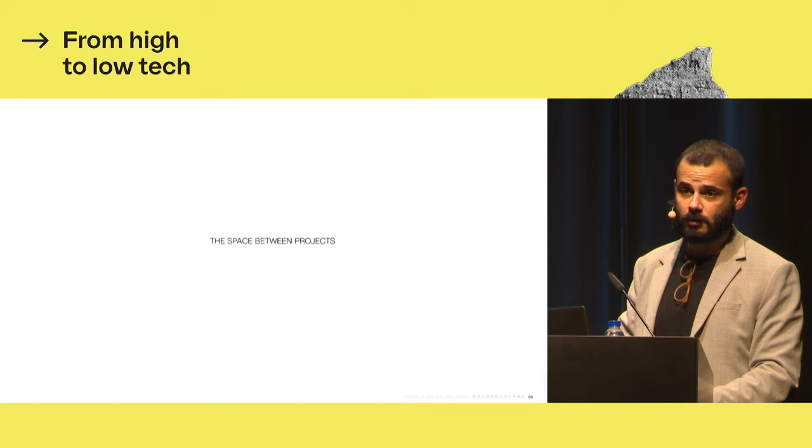And then to bring back a culture of collaboration, both in design and in construction, which is getting lost. And finally, to also frame architecture as an enterprise, as a continuous open-ended research that is better understood as a series of iterations rather than a finished product. So the lifetime of a single design project will rarely be enough to develop and perfect a new structural system or a new material application. At least this has almost never happened for us. It will be enough, however, to try to test and apply this partially and to explore further onto new projects.

Failure or partial failure is common, but the small successes help normalize the idea of using natural or non-standard or composite materials and stepping away from the comfort zone of mass-produced, mass-designed, catalog-sampled architecture that is disconnected from its natural, cultural, and material environment. This is why, for us, the work of the office is much better encapsulated by this tree diagram or map that we did 4 years ago, more than by any individual building.

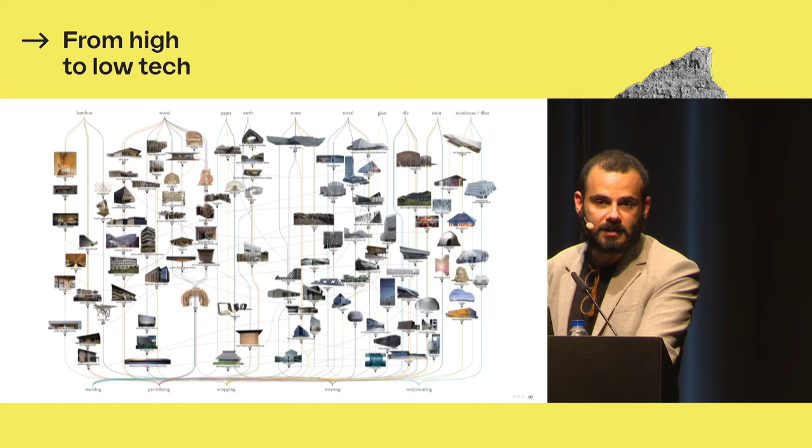And since we did put this map together 4 years ago, it has expanded. This is already obsolete by a lot. And our hope is to see really similar maps springing up in architecture practices around the world. And then perhaps we can start joining all the maps to a larger roadmap.

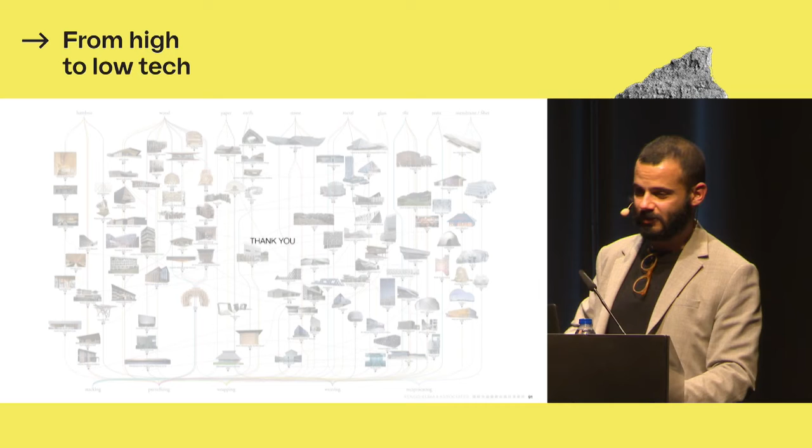Yes. To Aris. I moved to the shadow because these are like the sun. You're suffering. Any questions? No? No one? Well, I can try. Aris is on the stage, so no one is asking things, I guess.

So one question for you. We can see that although the office is very experimental, so you have all this plan that you're following, at the same time you have these very corporate clients, Starbucks, Sunny Hills. How does the office manage to keep track of this strategy? At the same time you have to deal with these dozens of clients that I can imagine are composed of boards and very bureaucratic decisions. So how does this work in the office structure? How do you manage to keep this going?

We have an advantage that we try to overplay, which is that we have already built this, not the tree, not my face, the tree. We have already built this image. Some people would say brand, which is a word I hate, but we've built this image of an office that works with natural materials or new materials, not just natural materials, and brings value out of that. So often, even corporate clients that come to us have a sense of respect for what we do, and very rarely would they ask us to do something atypical, like a large concrete building with a panelized aluminum facade. It sometimes happens, but often there is a certain level of respect and understanding.